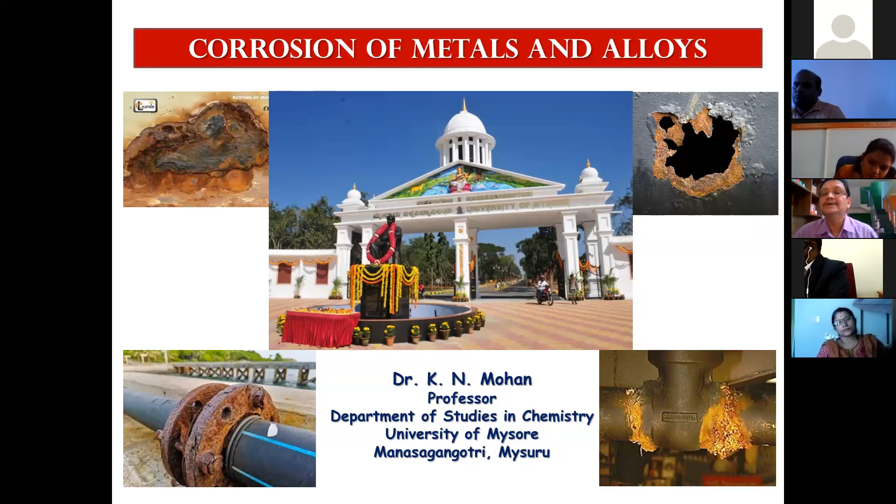So in today's talk, I am going to put before you some of the important basic aspects of corrosion of metals and alloys with the following viewpoints. So when we are talking about this particular process called corrosion of metals and alloys,

we need to understand why the study of corrosion of metal is so important. Is it that much important? That is the most important thing.

As you are the participants of the refresher course from different disciplines, you may all be coming from some of you participating from the chemistry background, physics background, material science background, electronics background, geology background. So in every area, we need to understand why the study of corrosion of metal is that important.

And the second thing is we must understand why metal is corroded. When metal is corroded, what is the mechanism? If it is so, what is the mechanism?

So once you understand this, is it possible to measure the corrosion rate? What are the techniques we use? Because we need to develop a most precise technique for the measurement of corrosion of metals and alloys. And also we need to understand the principle behind the measurement of corrosion rate.

So using this principle, what are the methods that we are going to adopt? And finally, I am also going to touch in today's talk on certain corrosion control strategies. I'm not going to speak more on corrosion control strategies today, because I have one more lecture on the 14th where I am going to talk about the present scenario in corrosion control strategies of metals and alloys. So with this viewpoint, today I am going to discuss a few important things.

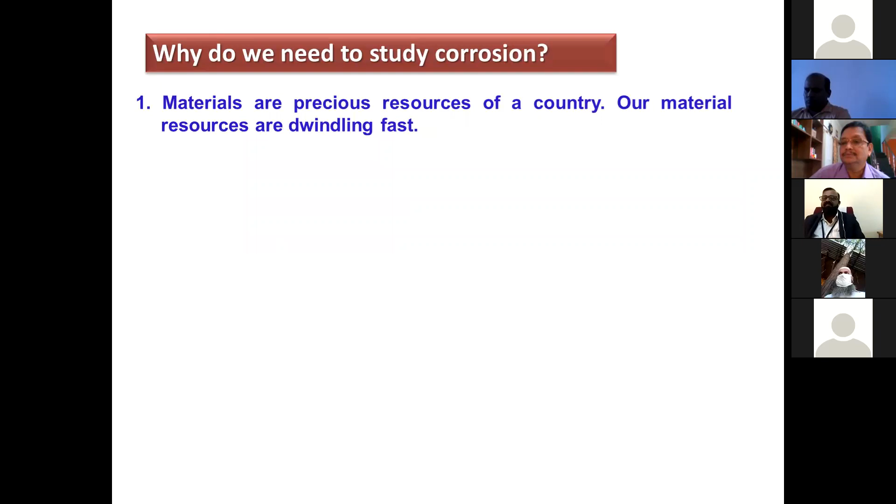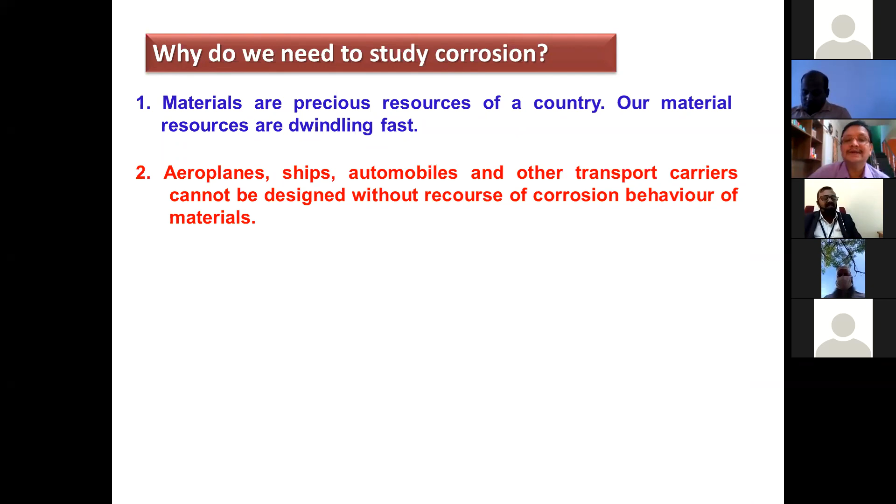We might notice corrosion in various areas like aircraft applications, marine applications, automobile applications, and transport carriers. Whenever you use materials in these applications, one must understand the designing aspects, which require knowledge of the corrosion behavior of the materials used. So in all these sectors, before designing a particular component, one has to look into the corrosion behavior of these materials.

We might have noticed various instances in the recent past, including crashing of civil and military aircraft, naval and passenger ships, explosion of oil pipelines and oil storage tanks, collapse of bridges and decks, and failure of drilling platforms and tanker trucks.

Last but not the least, another important area where the study of corrosion is important is that it is a threat to the environment. Whenever a metal gets corroded, it may cause pollution in the aqueous media, and pollution in the environment in various kinds of environments.

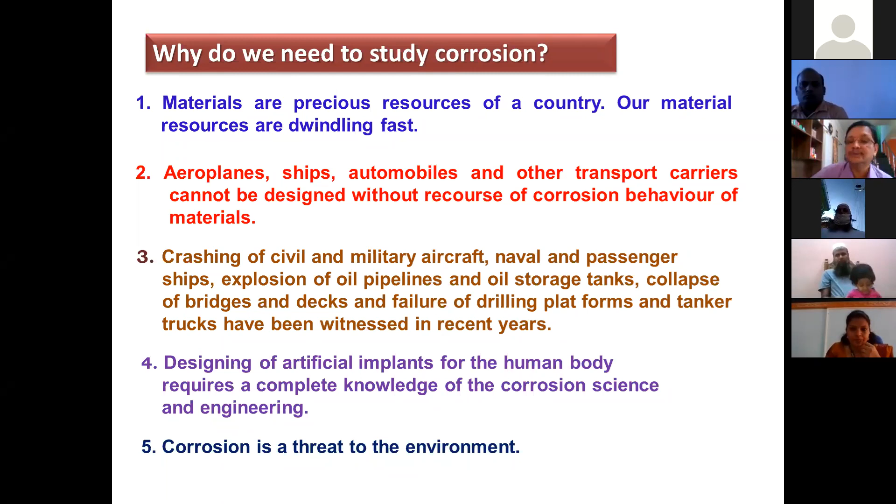Keeping these five important views in mind, one must understand that the study of corrosion is most important, and understanding the mechanism of corrosion is also most important in designing various components using metals and alloys in these industries.

So therefore, with this context, the study of corrosion of metal is also most important for safety of the equipment, and economics, because you might have seen premature failure of bridges and structures. One of the major reasons for this is corrosion. We might also notice the failure of operating equipment.

So therefore, almost all countries all over the world, due to industrialization and the use of various different varieties of metals and alloys, are pouring millions of dollars into just preventing metal from corrosion. We found that the cost of corrosion annually in the US is over $1.4 trillion. In 2019, it is around 4.2% of US GDP.

Also, a report in 2019 states the Indian economy suffers a loss of around 1,75,000 crore annually due to the corrosion of metals and maintenance, which is around 2.5% of Indian GDP. So therefore, the study of metal corrosion is a most important area in metallurgical operations in the materials sense.

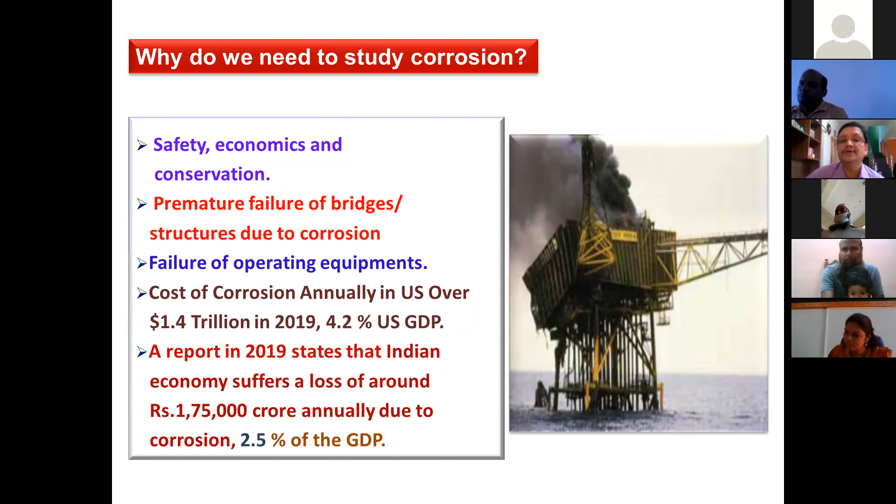I just put before you some of the incidents that happened in the recent past. One of the most important reasons reported for all these disasters is mainly due to corrosion. You might have noticed the Bhopal disaster that happened in December 1984.

One of the most important reasons for this disaster is the leakage of MIC, methyl isocyanate gas, a highly poisonous gas used as a pesticide. The leakage of this gas is mainly due to the storage tank, which is made up of steel. The inner part of the storage tank was damaged, which cannot be noticed from the outer surface. As a result, a small hole or small damage in this tank led to the leakage of MIC.

As you know, thousands of people lost their lives, and hundreds and thousands are still suffering. The report submitted by the fact-finding committee after studying all this indicated that the plant was not in good condition, and many of the machines were too old. That is the report submitted to the concerned authority.

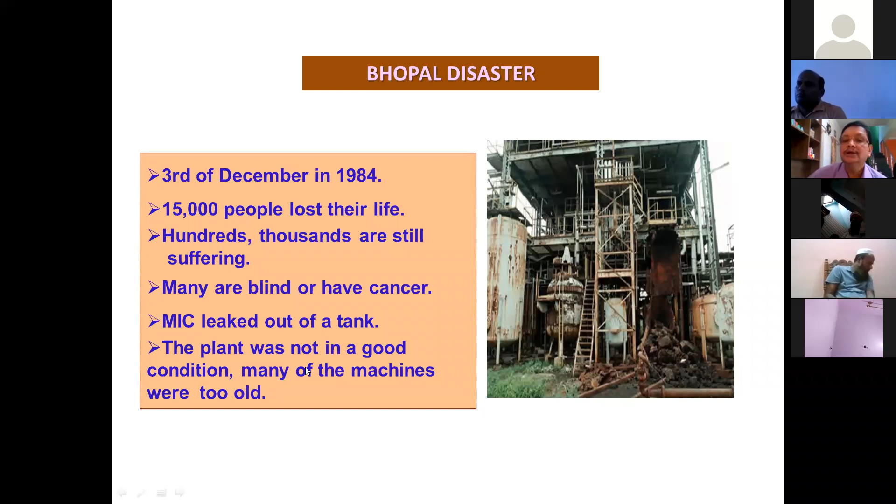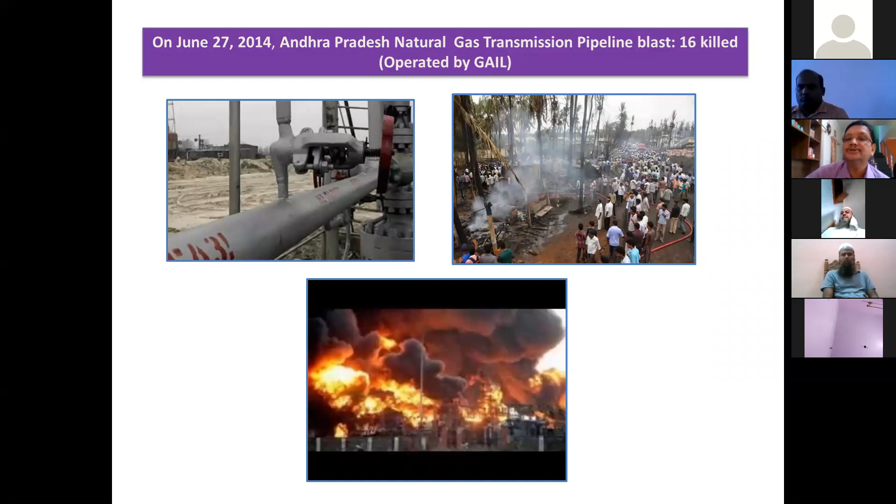So just look here at some other important incidents. One recently happened incident is in Andhra Pradesh in 2014, the natural gas transmission pipeline blast. This is one of the most important areas where corrosion of metal has extensive applications. This is GAIL, Gas Authority of India, where the inner part of this gas transmission pipe was damaged due to corrosion that was not noticed on the outer surface.

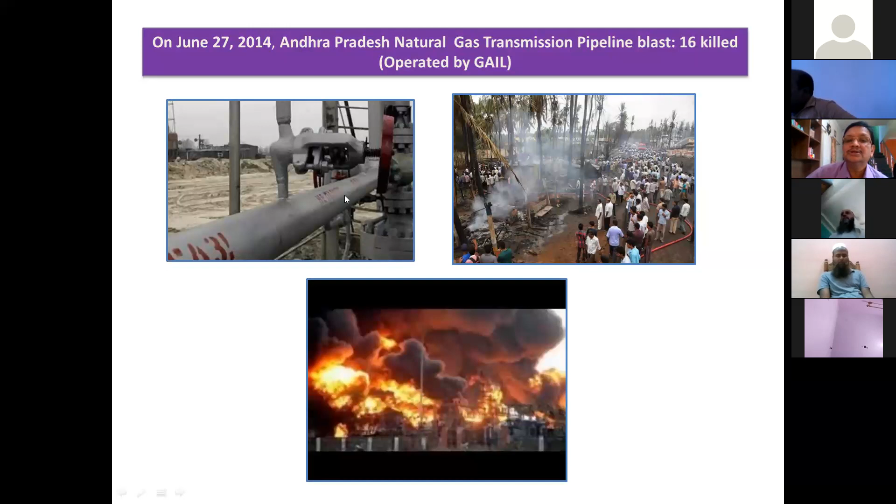Therefore, maintaining these pipelines or equipment from corrosion is a most important part, particularly in gas transmission pipelines. As a result, millions of dollars or millions of rupees are lost, and not only that, many people lost their lives. I think you might have noticed this recently.

The same type of natural gas transmission explosion occurs all over the world in various instances. Another important example is the Carlsbad, New Mexico gas line explosion. It happened in 2000, and is described as one of the second worst tragedies in US history. This is also a gas transmission pipeline damaged because of corrosion.

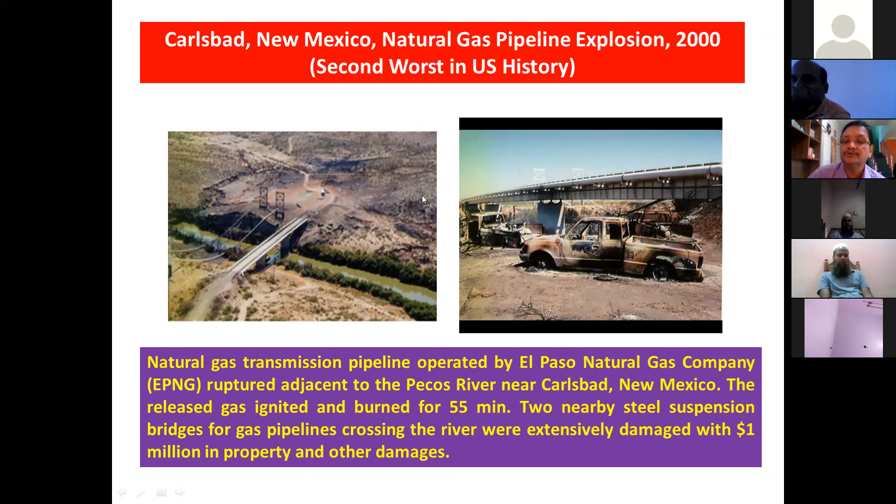This is one more incident that is also because of the gas transmission pipeline of British Petroleum Oil Gas, operated by the US, where this severely damaged the inner portion of the gas transmission pipe.

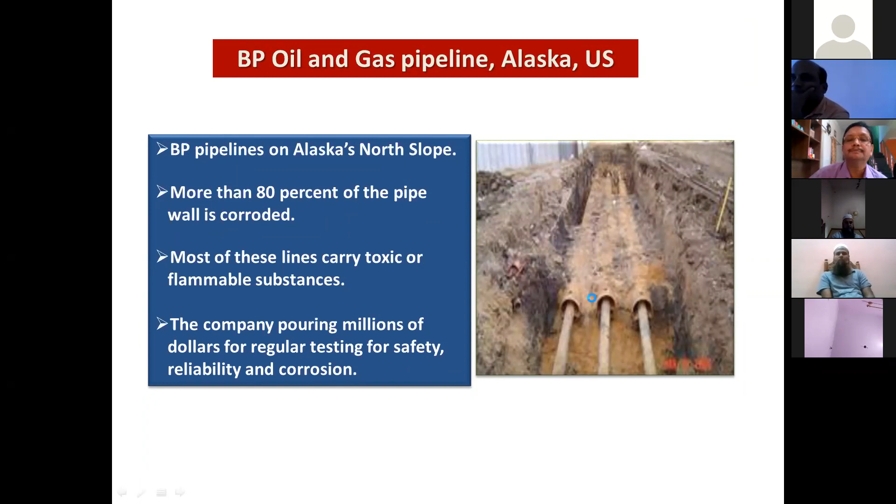Another most important area is aircraft application. One incident that happened, popularly called the Aloha incident, occurred on April 28, 1988. A 19-year-old Boeing 737 aircraft operated by Aloha Airlines lost the upper fuselage near the front of the plane at a flying height of around 24,000 feet. As a result, many people lost their lives.

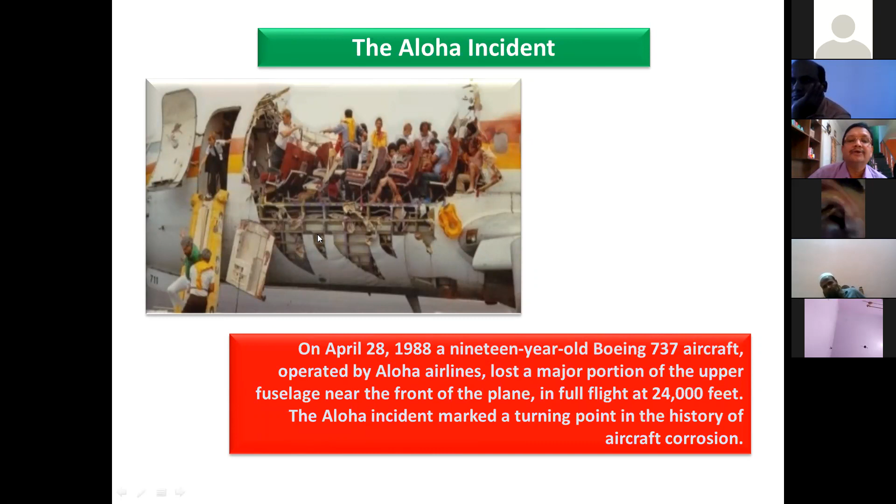The reason behind that, noticed after a fact-finding committee, was that certain parts of the aircraft were damaged because of corrosion.

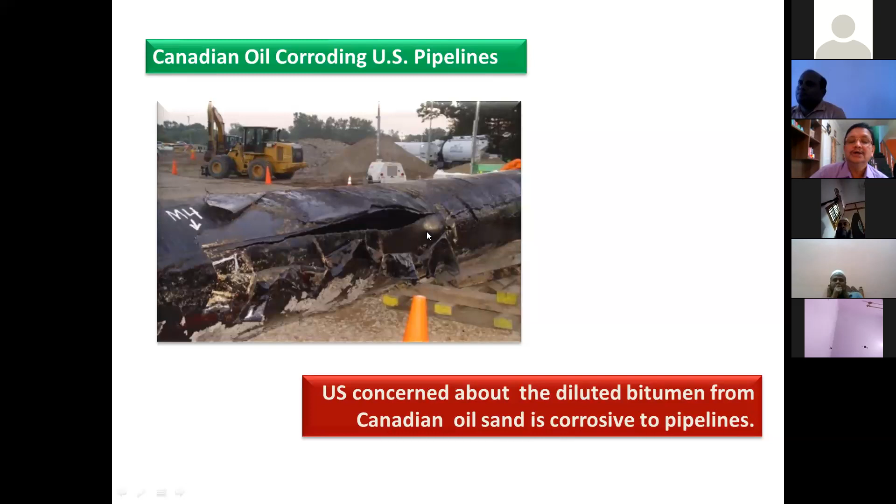This is one more example, the huge crude oil transmission pipeline operated by the US, where Canadian oil is transmitted through this huge pipe. One of the most important contaminants of this crude oil is a diluted amount of bitumen, which is highly corrosive. You might think, why not use the plenty of polymer-based materials used in oil and natural gas industries instead? But it is not possible to use these, so metals are inevitable to use in oil and natural gas industries. Therefore, they undergo corrosion because of the corrosive constituents in the crude oil. This is one important area.

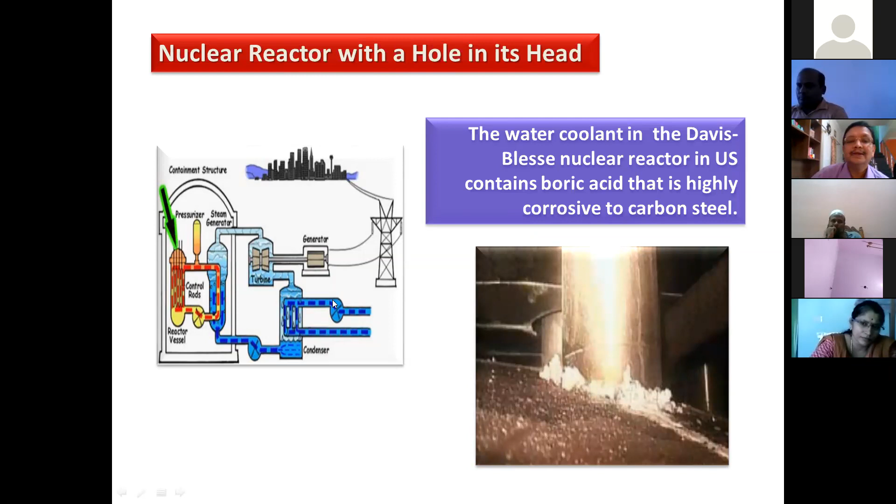As a result, one such incident happened in a nuclear reactor in the US called the Davis-Besse nuclear reactor, where the reactor vessel was damaged. You know the mechanism and type of process occurring in a nuclear reactor - if even a small damage occurs in the reactor vessel, you can imagine the type of disaster that could result. That is also due to corrosive substances.

This is another important example. The same kind of disaster happened in the Mihama 3 nuclear reactor in Japan in 2004, called pipeline rupture caused by flow-accelerated corrosion. These are other important examples.

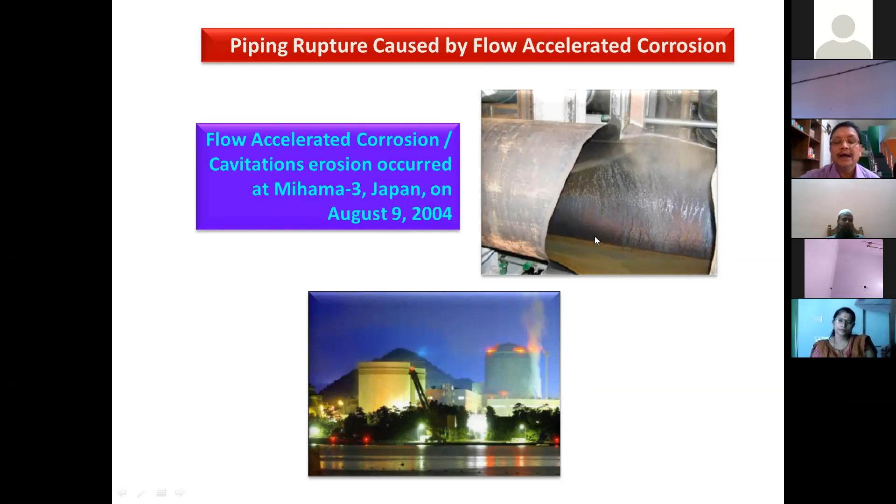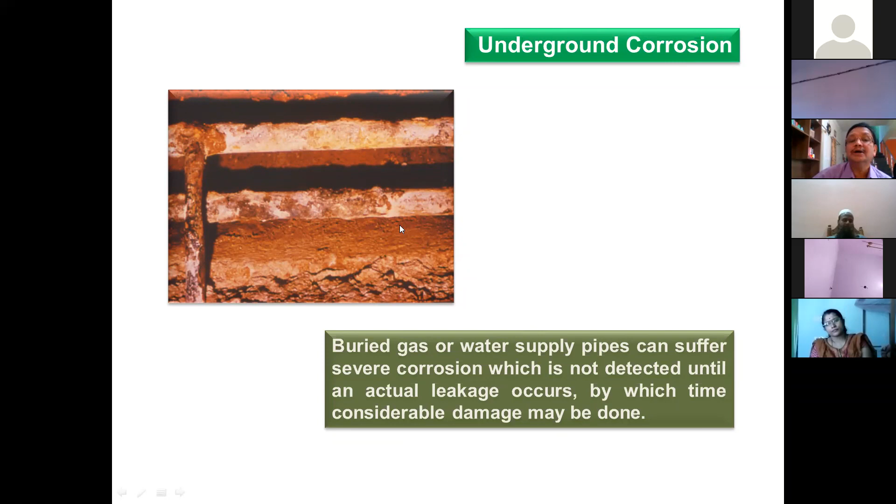Here you see the inner part of a gas or water transmission pipeline. Of course, the outer portion of this buried pipeline looks fine, but the inner portion is severely damaged. This causes severe damage before you even notice that damage has occurred in the pipeline.

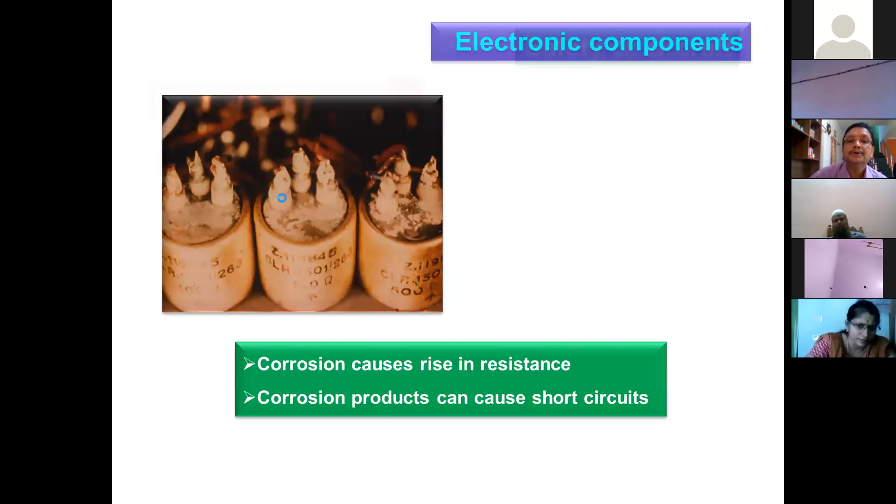More importantly, metals and alloys are used in various electronic components because metals are very good conductors of electricity. These materials, in a humid atmosphere and under atmospheric conditions, get damaged due to corrosion, which leads to rise in resistance and can also cause a short circuit. This is one of the most prone parts of aircraft applications, subjected to severe damage because of corrosion.

Another important sector where corrosion plays a significant role is marine applications, where some of the important components are made up of certain metals and alloys. These metals and alloys are also subjected to highly corrosive electrolytes of seawater, which contains a large quantity of dissolved salts. Apart from that, there are high buffeting waves. All these factors are responsible for damage to marine components, so in marine applications, the corrosion of metals or alloys plays a most important role.

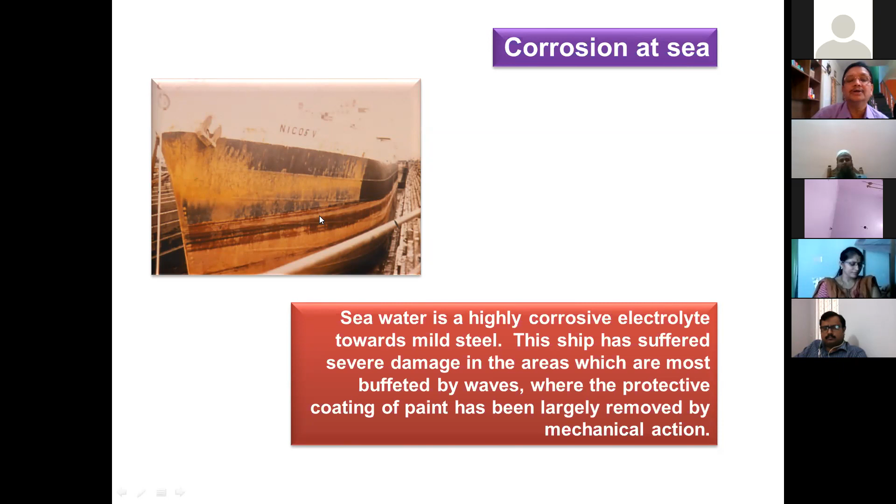So when looking into all these important examples, we find that the study of corrosion of material or metal is a most important part from the materials point of view. Therefore, today's talk is restricted to the corrosion of metals and alloys, but not necessarily only metals and alloys undergo corrosion.

Almost all varieties of metals undergo deterioration, meaning they lose their properties and mass due to environmental effects. It is a natural tendency. The process of corrosion is a natural tendency of the compositional elements present in materials, so that the materials or metals return back to their most thermodynamically stable state, which I'll explain a little later.

As I told you, today's talk is restricted to only metals and alloys. Not necessarily, there are plenty of other materials including polymers, plastics, rubbers, ceramic materials, concretes, bricks, and varieties of composite mechanical mixtures of two or more materials with different properties. They also lose their properties due to different environmental constituents and effects.

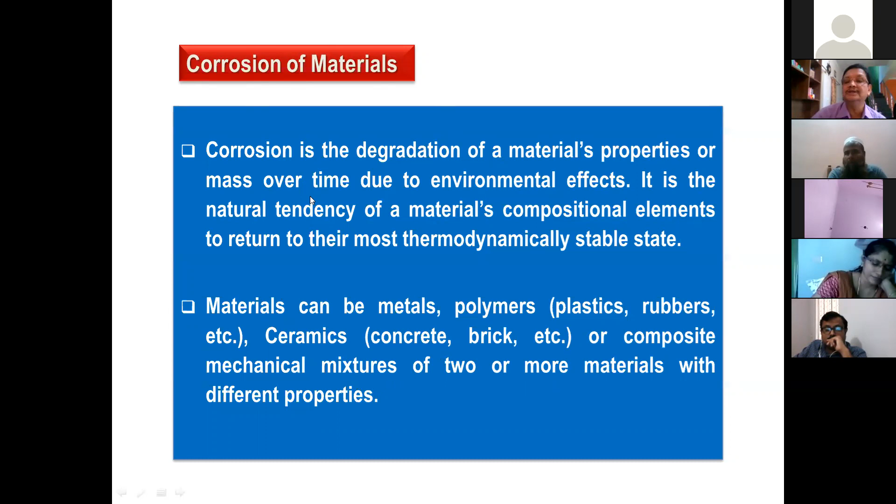So as I told, metals or materials get deteriorated and lose their properties due to varieties of environmental factors, and because of the elemental composition of the materials. The question here is: why is it so? Why does the metal get corroded?

Almost all metals and alloys are chemically unstable with respect to the environment, which includes varieties of constituents. We commonly call these corrosive constituents. They may be in the gaseous state, sometimes in the liquid state, sometimes in the vapor state. These corrosive constituents inevitably come in contact with materials, and therefore the material loses its stability.

Whenever a material loses its stability or undergoes corrosion, it may occur by means of an important chemical process called the oxidation process. This oxidation process is mainly responsible because of the presence of plenty of oxygen in the corrosive environment. Therefore, there is a certain driving force which causes the metal to undergo corrosion.

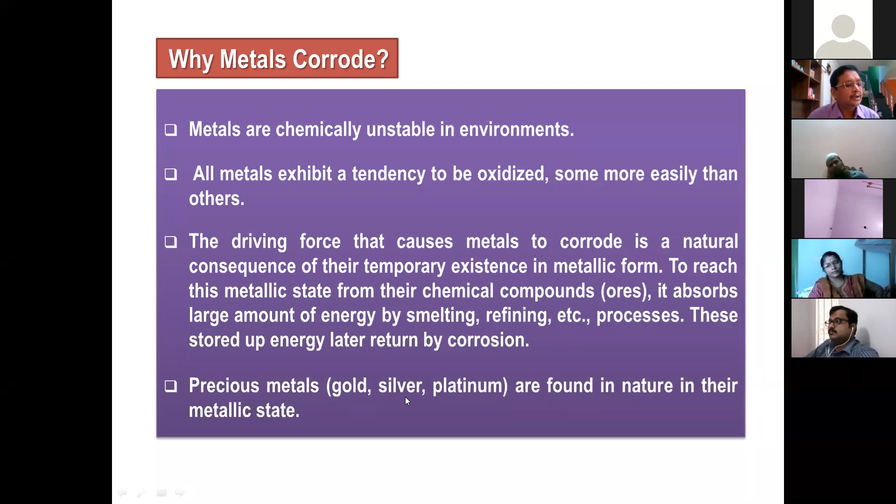When these metals are in contact with certain corrosive constituents, maybe gases, liquids or vapors, they tend to lose this stored energy by means of this process called corrosion. This is a spontaneous process that doesn't require any external supply of energy. The metal loses its thermodynamically stored energy. But certain metals like gold, silver, platinum, palladium are available in their native states and are stable for a certain extent. This is the technical reason behind why metals get corroded.

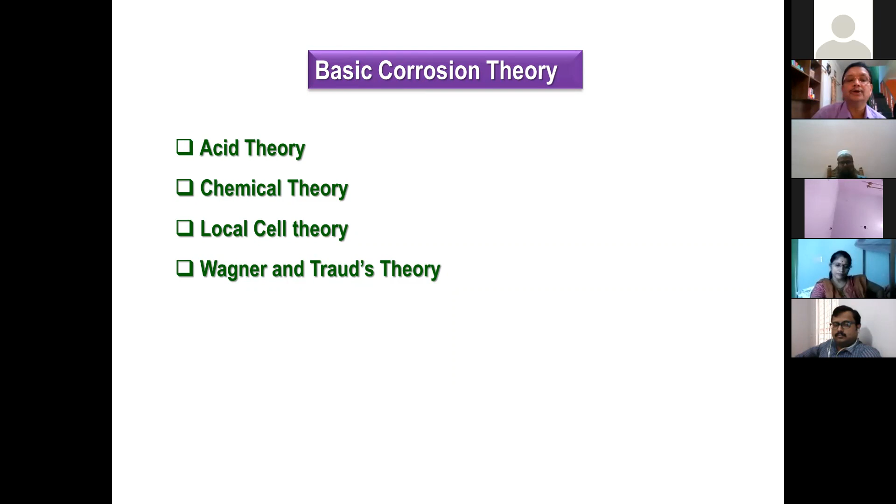Once you understand why metal gets corroded, there are varieties of theories which explain the mechanism of corrosion. Let me put before you a few important ones, starting from a very basic acid theory to the most accepted and well-developed theory called Wagner and Traud's, or local cell theory of corrosion. So there are four theories: first, acid theory of corrosion; second, chemical theory; third, local cell theory; and lastly Wagner and Traud's theory, proposed by an electrochemist, which is the most accepted theory. I'll go very briefly through all four theories of corrosion, not in detail.

As this theory itself says, the corrosion of any metal is due to the contact of this metal with some acidic environment. Not necessarily a direct contact of metal with acids like sulfuric acid, nitric acid, hydrochloric acid, or carbonic acid, but there is a generation of these acids due to the constituents of the atmosphere. The major constituents of atmosphere are atmospheric carbon dioxide, moisture, and plenty of oxygen.

The presence of these three important constituents in the atmosphere is responsible for the generation of acidic components, mainly carbonic acid or bicarbonic acids. This acid generated due to these chemical constituents in nature is responsible for the metal undergoing corrosion, leading to the formation of corrosion products like iron bicarbonate, iron hydroxycarbonate, and ferric hydroxide. This is a simple reaction mechanism.

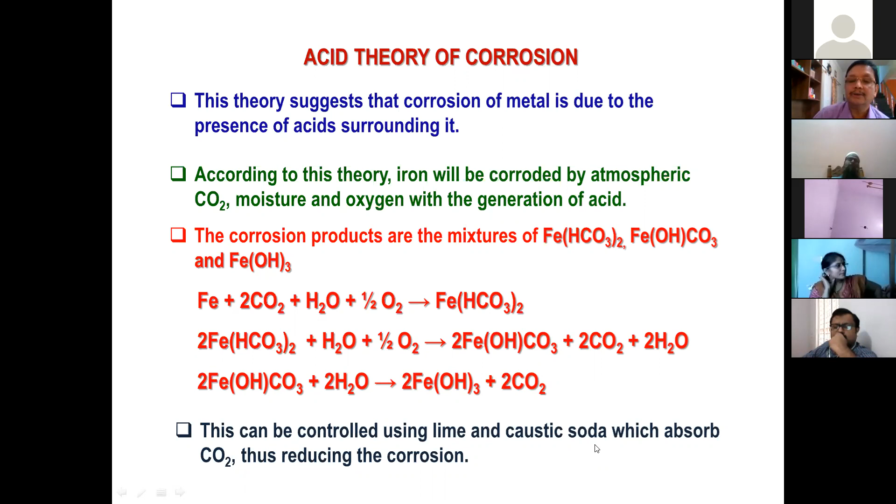The second theory is the chemical theory, also called dry corrosion. Not necessarily is an acidic environment responsible for metal undergoing corrosion. There are plenty of atmospheric gases like oxygen, halogens such as chlorine, bromine, iodine, oxides of sulfur, hydrogen sulfide, oxides of nitrogen, and fumes of various chemicals which are responsible for metals undergoing corrosion, provided the metals are in good contact or good affinity with these atmospheric gases. Therefore, the extent of corrosion of any metal depends upon the chemical affinity of the metal towards these reactive gases in a dry condition, in the absence of moisture.

In spite of all these, oxygen is one of the most important constituents responsible for most of the corrosion of substances compared to other gases and chemicals. So depending upon the type of gases involved in dry corrosion, we call it oxidation corrosion where oxygen is responsible for the corrosion of metal, or corrosion by varieties of other gases like chlorine, sulfur dioxide, hydrogen sulfide, oxides of nitrogen, since these gases are responsible for corrosion.

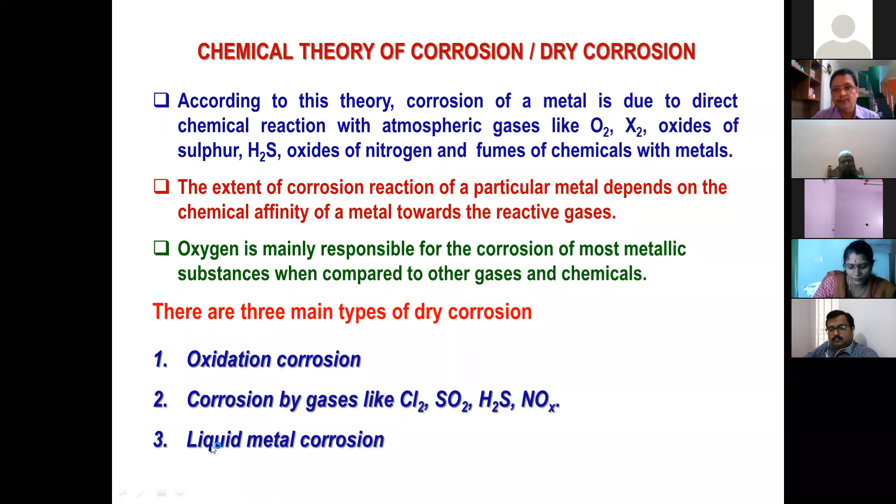The third theory, which is the most accepted and still used for prevention of varieties of metals, is called local cell theory. One must have a brief knowledge of electrochemistry to understand this local cell theory of corrosion.

There is a formation of electrochemical cells on the surface of the metal. These cells formed on the surface of the metals are commonly called local cells. These local cells are created on the surface of the metal due to one of the most important reasons: heterogeneities on the surface of the metal. The metals are not homogeneous in nature. While it is being made, there are varieties of inhomogeneities, imperfections, and disorders.

We commonly call this heterogeneities. This is one of the most important reasons for the generation of local cells, for the creation of local cells on the metal surface.

Once these local cells are created on the metal surface, there is a difference in potential developed on the same metal surface, on different parts of the metal surface. Once the potential difference is developed, it acts as a local cell, an electrochemical cell. This cell is responsible for any metal to undergo corrosion, as was well explained by local cell theory.

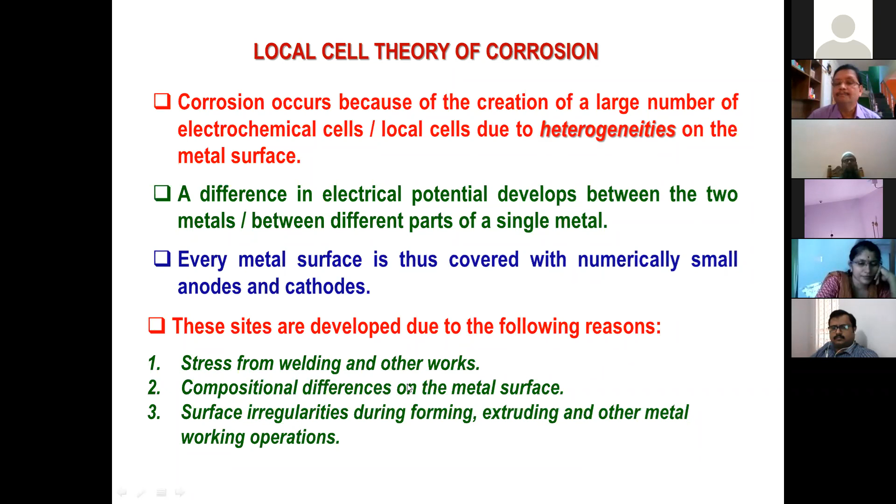Finally, the extension of the local cell theory of corrosion was well explained by the theory called Wagner and Traud's theory. There is a small modification in this theory. Of course, this creation of cells on the surface is essential for the metal to undergo corrosion, but the impurities and other heterogeneities are not such an important factor for the creation of cells.

The most important thing explained by Wagner and Traud is that the corrosion of a metal is accompanied by a cathodic reaction. Whenever a cathodic reaction occurs simultaneously on the metal surface, there must be some cathodic material. The cathodic materials are corrosive causing materials, a corrosive environment.

So once a metal is in contact with the corrosive environment, there will be formation of corrosion cells, electrochemical cells, anodic and cathodic regions. So it's not due to heterogeneities, it is mainly due to the corrosive environment which is responsible for the metals to form corrosion cells.

These corrosion cells involve three important chemical processes. The first important process is the anodic process, called the oxidation reaction. The oxidation process occurs at the anodic area of the metal because of its very low electrode potential. Once the anodic process takes place, the electrons get released, and these released electrons flow through the metal towards the cathode.

Therefore, corrosion follows basic laws of thermodynamics. It is an electrochemical process. So under controlled conditions, it can be measured, it can be repeated, and it can also be predicted.

The corrosion process is accompanied by an electrochemical reaction involving two half cell reactions. In one half cell, anodic reaction takes place, and in the other, cathodic reaction takes place. Anodic reaction is the release of electrons, oxidation.

The cathodic reaction depends on the nature of the corrosive environment. Depending on the nature of the corrosive environment, there are three cathodic reactions: oxygen reduction reaction, hydrogen evolution from neutral environment, or hydrogen evolution from acidic environment.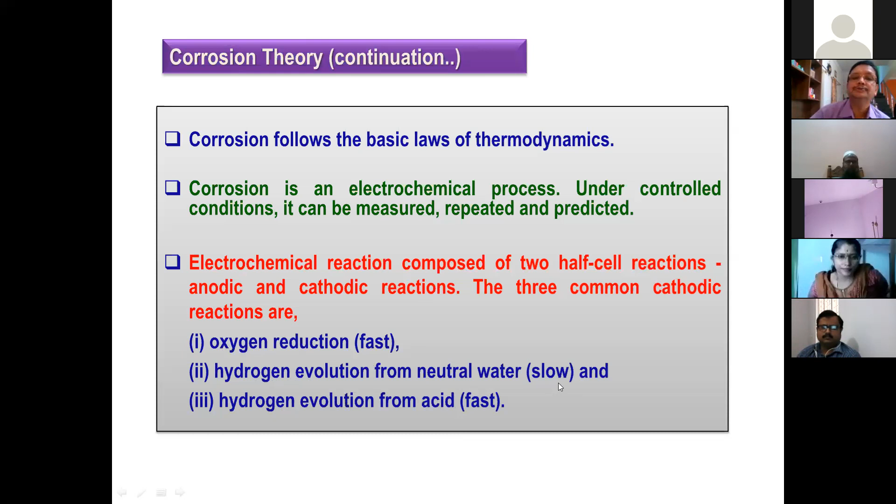This is the mechanism of the corrosion reaction explained by Wagner and Traud. This is an oxidation reaction where the metal is getting oxidized with the release of electrons. These electrons are then reduced in presence of varieties of corrosive environments. It may be evolution of hydrogen in the absence of oxygen.

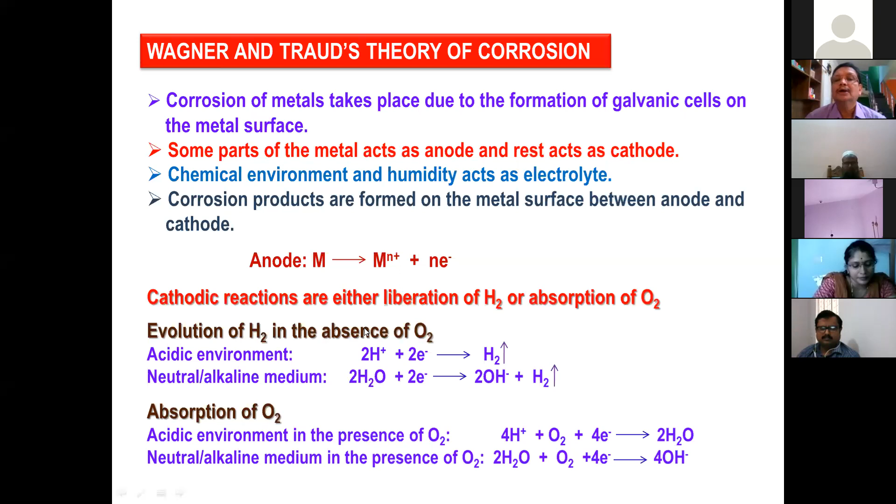It is an acidic, neutral, or alkaline environment. This is how evolution of hydrogen occurs, and this reaction occurs in the absence of oxygen. These are the varieties of cathodic processes occurring in the electrochemical corrosion mechanism.

So this is how, when a metal like iron is in contact with a corrosive environment, some part of the metal, because of its lower potential, acts as an anodic region. This is the anodic region where oxidation occurs. The released electrons move through the metal, with electrons flowing through it.

These electrons, in contact with certain corrosive environments - say an acidic environment here, or sometimes a neutral environment - get reduced with the evolution of hydrogen gas. This process continuously takes place until the whole metal in contact with the corrosive environment is completely deteriorated by means of corrosion.

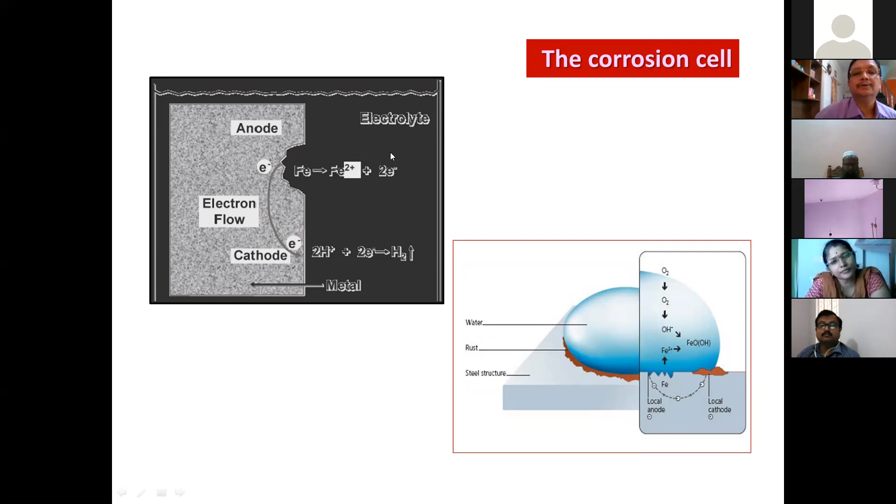Once you understand the theories of corrosion, two important processes occur: the anodic process and the cathodic process. The anodic potential and cathodic potential of a metal play the most important role for the severity of corrosion. Therefore this potential is called oxidation potential and reduction potential. Together we call it oxidation-reduction potential.

This anodic potential is denoted by EA, which combines with the cathodic potential denoted by EC. The total potential is E. If this total potential is a positive quantity, then the reaction proceeds - I mean, the corrosion reaction proceeds spontaneously. Therefore, corrosion is a spontaneous process.

So almost all metals have a unique value of this corrosion potential. They are called so under standard conditions. So this potential we call the standard electrode potential, denoted by E naught. This value, the standard electrode potential of a metal under standard condition,

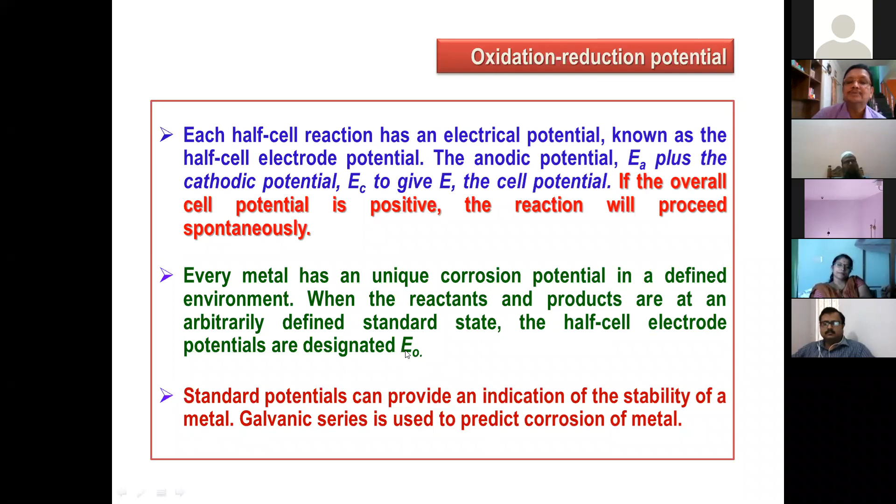signifies the nature of corrosion and the extent of corrosion in a corrosive environment. Therefore, the value of the standard electrode potential plays the most important role in understanding the severity and magnitude of corrosion. So this value of standard electrode potential has been determined and tabulated in the form of a table.

So this is a table. This is a standard table which is available in almost all literature. These are the normal cathodic reactions - I have selected a few important metals. This is the respective standard potential value.

Look here, at the top is gold, having a value around 1.5. If you keep moving towards the bottom, this potential value slowly decreases and comes to a negative value when you move almost to the bottom.

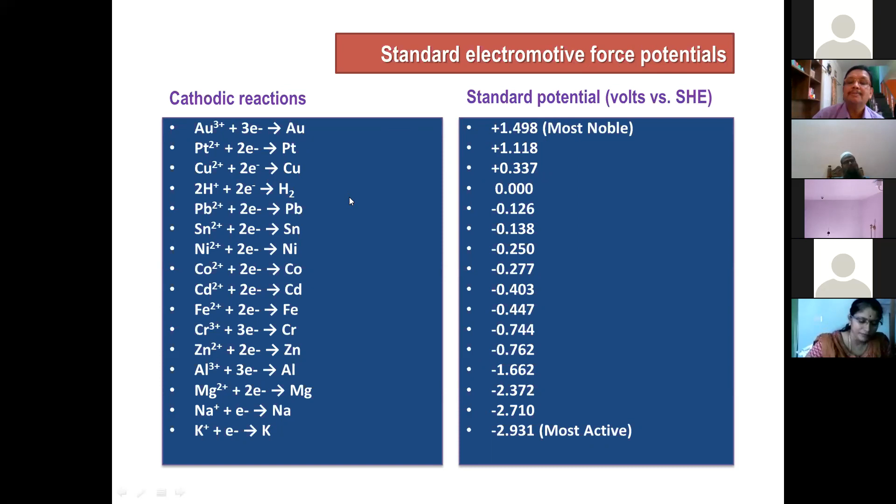Look at certain metals like potassium, sodium, magnesium, aluminum, and so on - they have a negative potential value. Any metal whose electrode potential is highly negative is more prone to corrosion; they are the most active metals. Metals with more positive values are more stable metals. So the value of the standard potential decides the magnitude of corrosion in a corrosive environment.

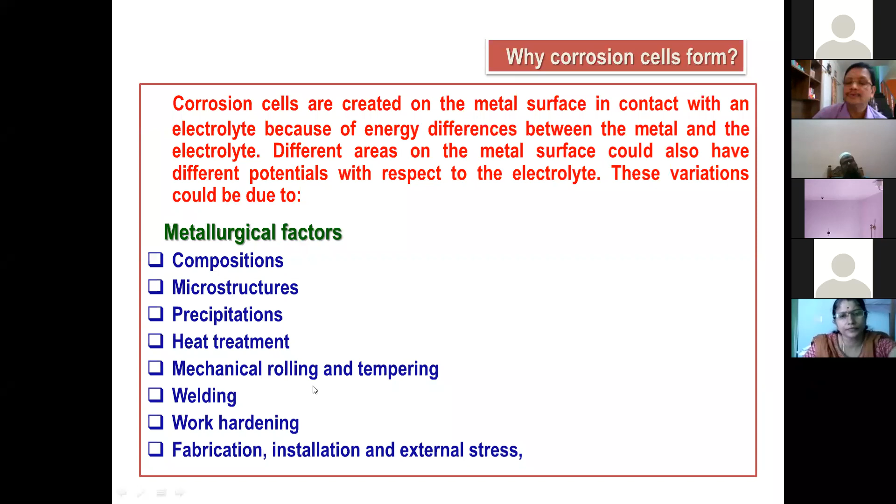So I told you corrosion cells are formed on the metal surface. How are corrosion cells formed on the metal surface? The corrosion cells are formed on the metal surface due to varieties of metallurgical factors - these are some important ones like composition, microstructure, precipitation, heat treatment, mechanical rolling, welding, work hardening, fabrication, and installation. There are varieties of metallurgical factors responsible for corrosion of metal.

Apart from that, there are varieties of environmental factors - like concentration of the corrosive environment, which forms a concentration cell, environmentally induced stress corrosion cracking, hydrogen induced cracking. Certain microorganisms are responsible for corrosion, called MIC - microbiologically induced corrosion - temperature induced corrosion, mechanical environmental induced erosion, galvanic, CP impressed current anodic dissolution.

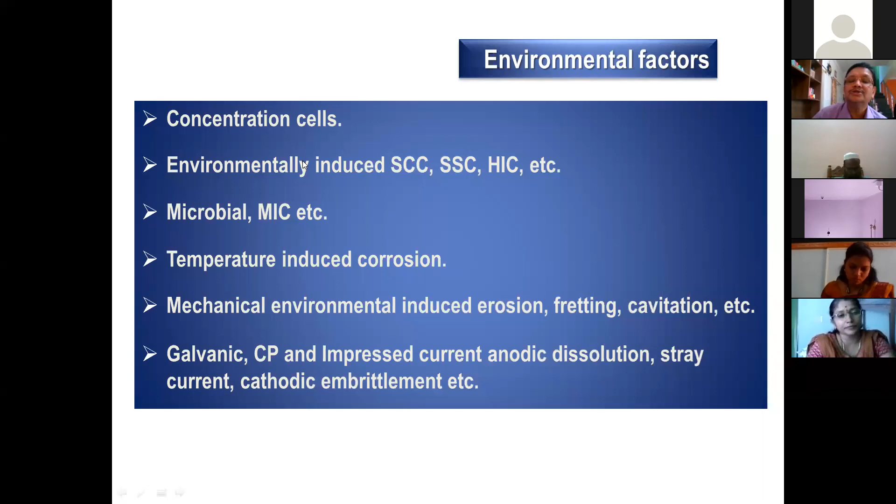So therefore there are plenty of environmental factors responsible for metals forming corrosion cells, anodic and cathodic environments. So depending upon the nature of the corrosive environment, we have varieties of corrosion, because we need to understand that certain corrosive environments are responsible for a particular kind of corrosion.

Depending on the kind of corrosive environment, we classify different classes of corrosion. One important class is uniform corrosion, where corrosion of metal occurs uniformly, and only one kind of corrosive environment is responsible for this type.

Number two is galvanic corrosion. This occurs due to the formation of a galvanic cell, one of the most important kinds of electrochemical cell, when two different metals, say copper in contact with iron, having different potentials, are in contact with a corrosive environment. A cell is created called galvanic cell, which is responsible for corrosion of the metal.

This is differential aeration corrosion, popularly called concentration cell corrosion. When a particular metal is in contact with a corrosive environment of different concentrations, the portion exposed to lower concentration acts as an anodic region, while the portion exposed to higher concentration acts as a cathodic region.

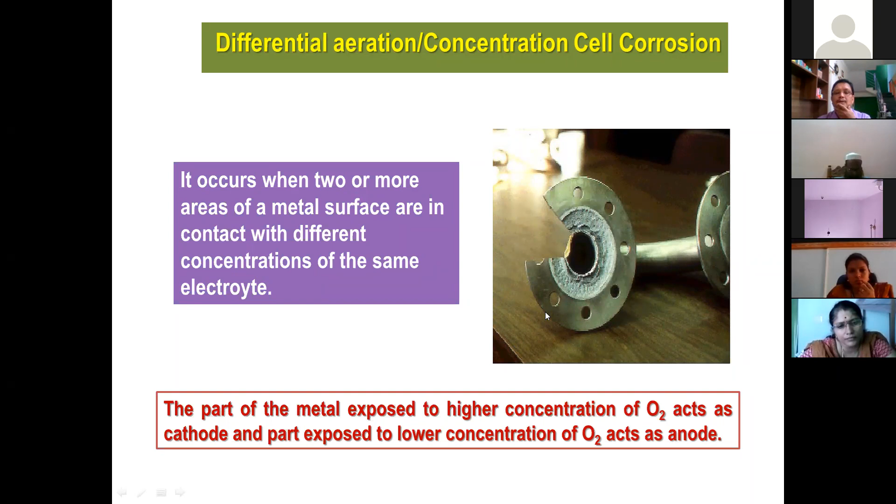Crevice corrosion is normally noticed in some automobile applications, where metals are in contact with metals, or sometimes metals are in contact with non-metals. In presence of a corrosive environment, this is responsible for crevice corrosion.

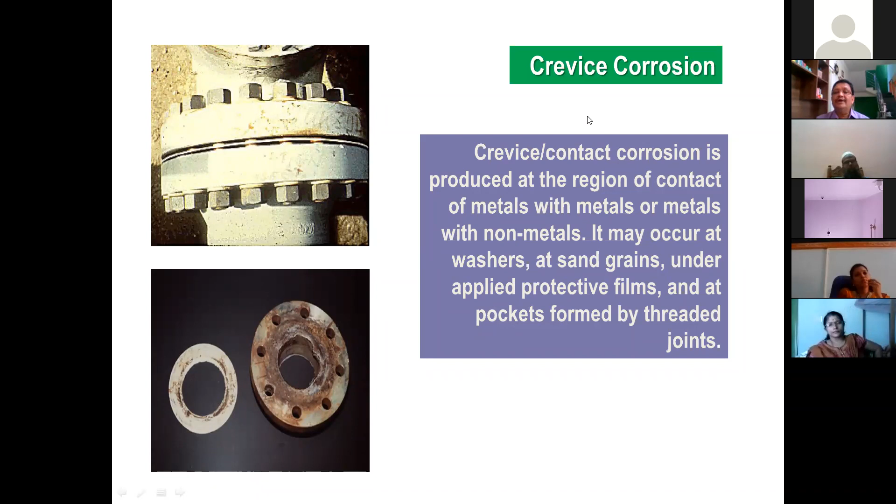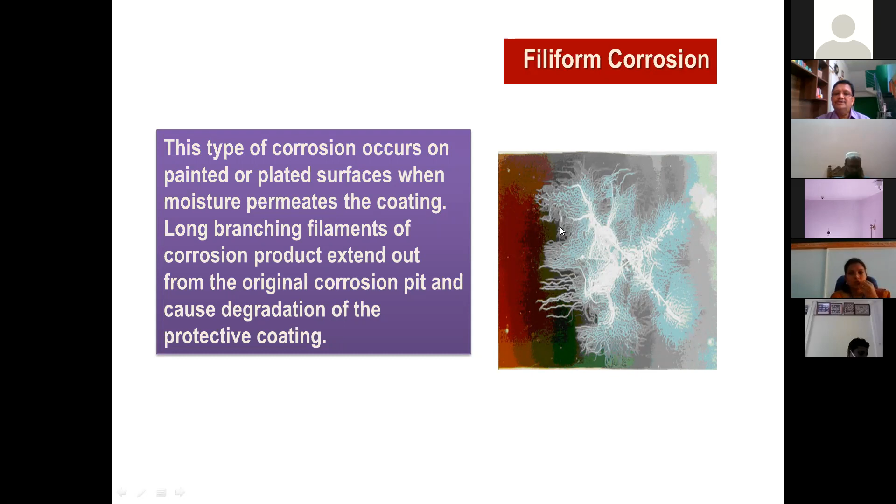Filiform corrosion is one of the most dangerous types, because one of the most important protocols for protecting metal from corrosion is plating or coating, whether organic coating, polymer coating, or metal coating. While coating a metal, we must take important precautions, because if there are any micro defects on the coating, corrosive electrolytes penetrate through these micro defects, and the entire inner portion of the metal is severely damaged due to corrosion.

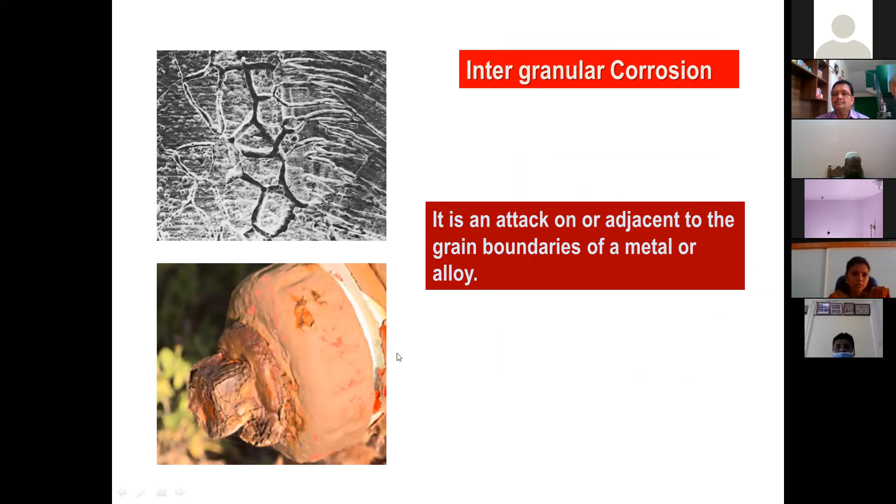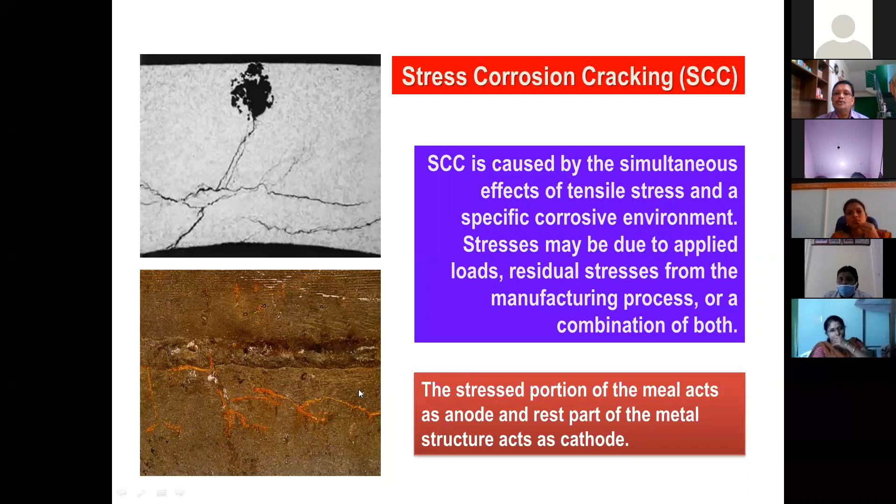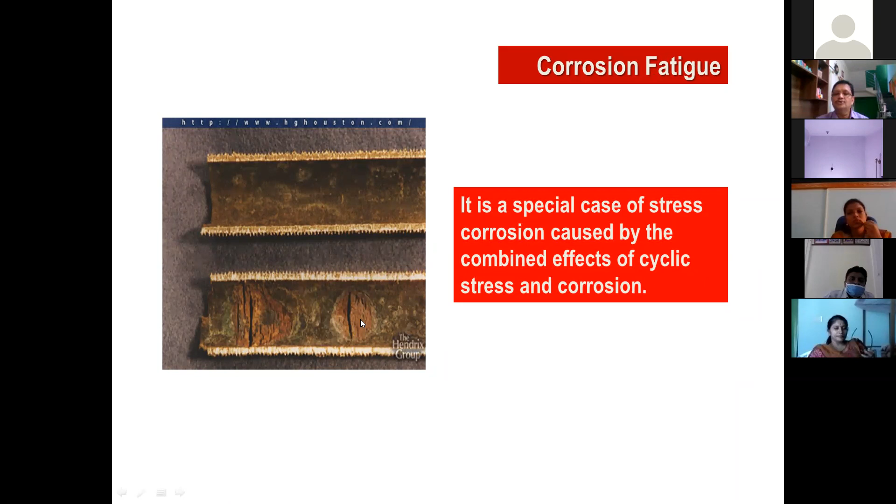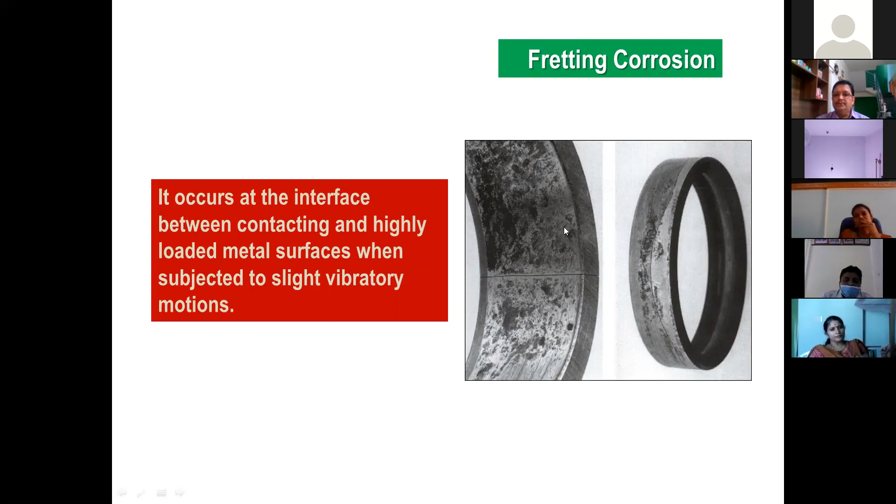Fretting corrosion is normally noticed in some automobile operations, where a high-speed rotating wheel is subjected to this kind of corrosion.

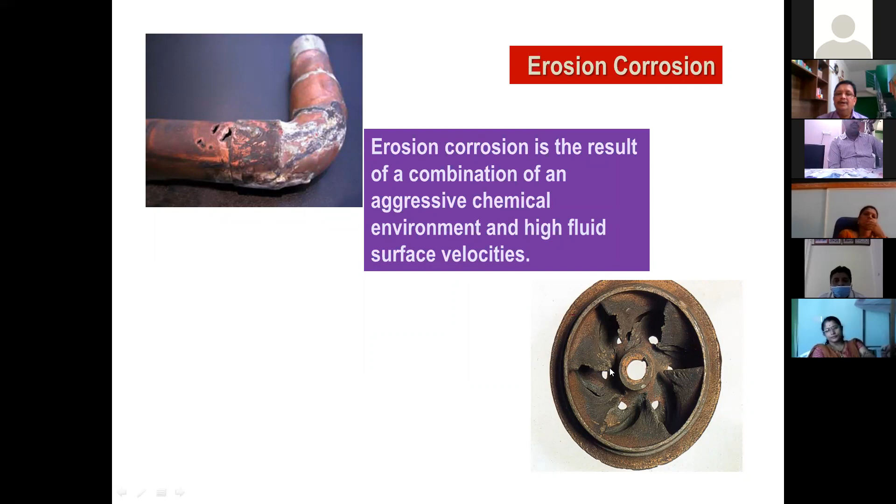De-alloying is another kind of corrosion where the alloy gets depleted. One important protocol to minimize corrosion is making the metal into an alloy, so when the alloy portion of the metal is depleted, the metal undergoes corrosion through a de-alloying process.

Corrosion in concrete occurs because plenty of varieties of reinforcing materials are used in concrete structures, which undergo severe damage due to a highly corrosive environment.

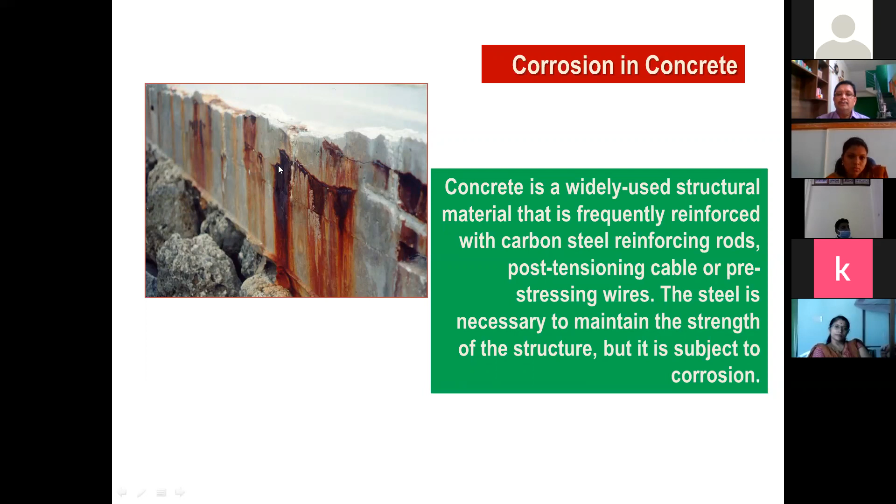Microbial corrosion is another important form of corrosion where certain microorganisms are responsible for metals undergoing corrosion, because the activities of microorganisms generate certain acidic or alkaline environments, and these environments are prone to corrosion.

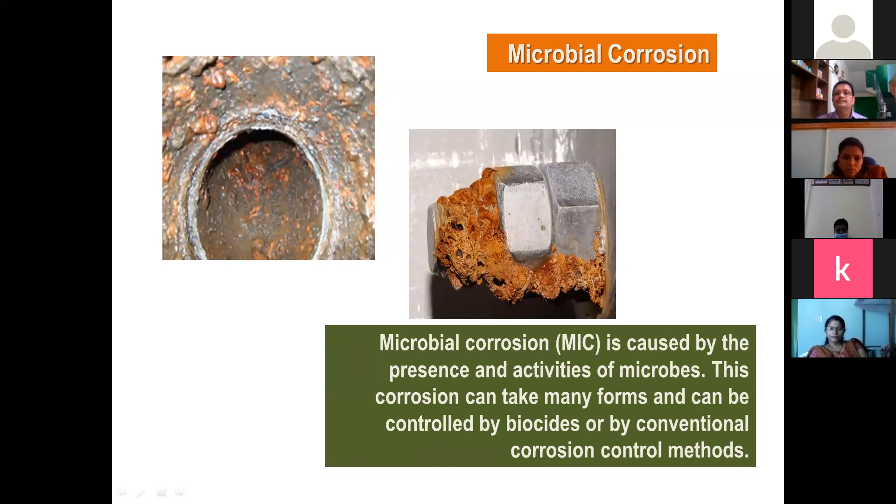So, keeping in view the different forms of corrosion, let me now briefly look into the varieties of different techniques used to measure the corrosion rate, which we call the kinetics of corrosion. The measurement of corrosion of a material or metal in a known corrosive environment is a most important task for a metallurgist, chemist, or anyone from a scientific background. When we look into the different techniques employed for measuring corrosion rate, we normally follow three important techniques.

One is called the mass loss technique, also called the gravimetric technique. Number two is the chemical technique. And the last one, and the most important, is the electrochemical technique.

This mass loss is based on the quantity of metal lost during corrosion. Once a metal is corroded under a known corrosive environment, a certain portion of the metal loses its property, meaning it is converted into its respective ore or compound. The metal converted into compound is lost, and the quantity of metal lost is taken into consideration in the analysis of corrosion rate. That is called the mass loss technique.

In chemical technique, certain chemical, physicochemical, or analytical techniques are used to analyze the material converted into corrosive compounds. There are plenty of chemical techniques, which may be electrochemical technique, or photochemical technique. There are varieties of spectroscopic techniques employed to analyze the quantity of metal lost by corrosion.

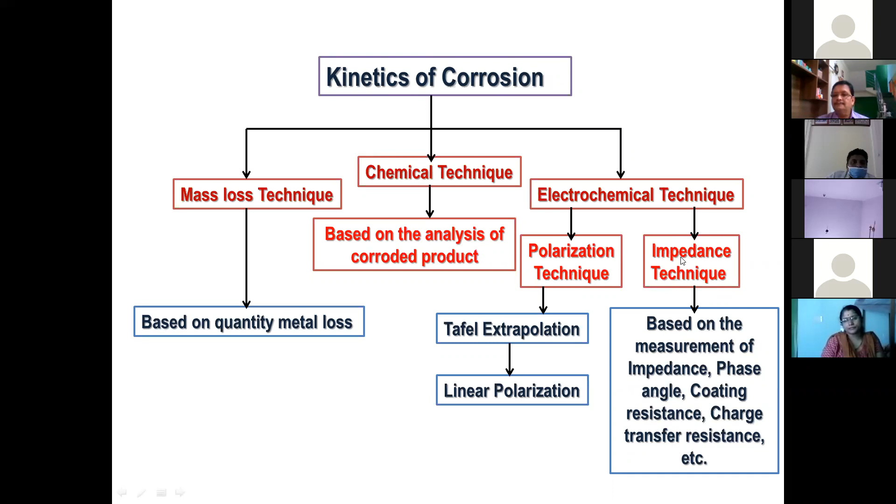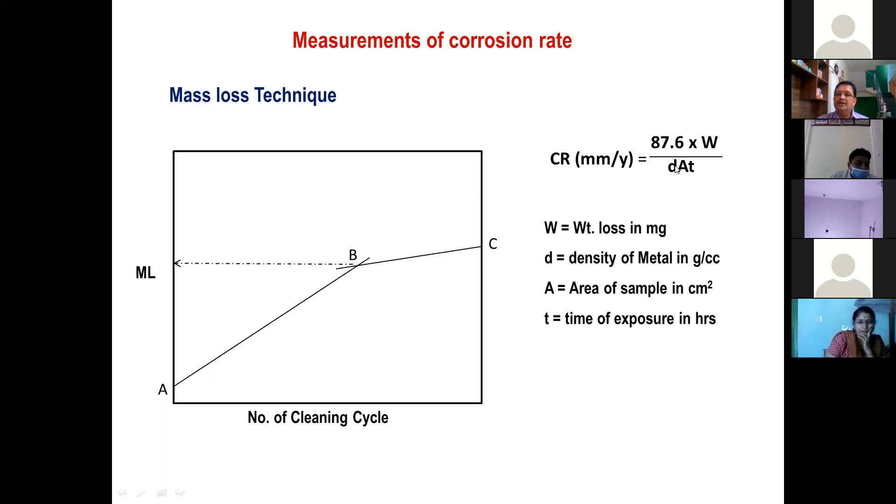This is the mass loss technique. We follow this protocol: once you measure the quantity of mass loss, keeping that in mind, we can calculate the corrosion rate using a simplified mathematical equation.

In polarization technique, I will give you some brief background on the principle involved in measuring corrosion kinetics. It is a measure of the polarization behavior of the metal. When a metal undergoes corrosion, a transfer of electrons takes place, since corrosion is an oxidation process. The extent of electron transfer is a measure of the current, called corrosion current.

Almost all metals under standard conditions are at an equilibrium potential, called standard equilibrium potential. Whenever a metal corrodes in a corrosive environment, the potential changes from the equilibrium value. This process of changing potential from the equilibrium value is called polarization. Polarization may occur in the cathodic direction due to a change in cathodic polarization, or it may occur in the anodic direction, meaning it may change in the anodic reaction. The extent of change in cathodic or anodic polarization is measured by means of the polarization technique.

In this technique, we use an external circuit to accelerate the anodic reaction by shifting its potential in the cathodic direction or the anodic direction. Once we supply external current, we keep measuring the potential and analyze the anodic polarization and cathodic polarization in the form of a curve, a plot.

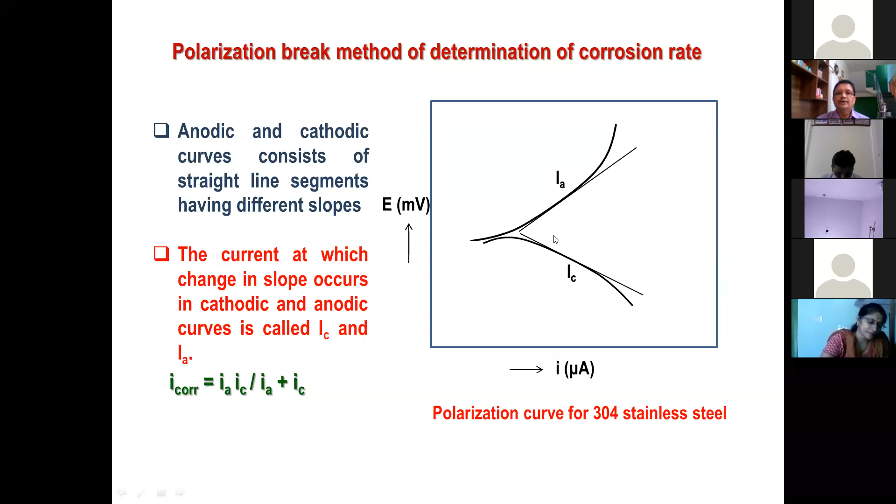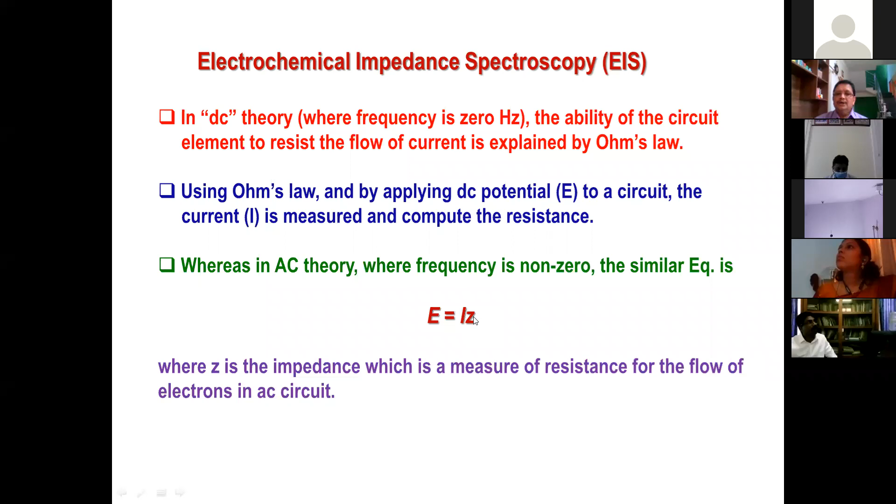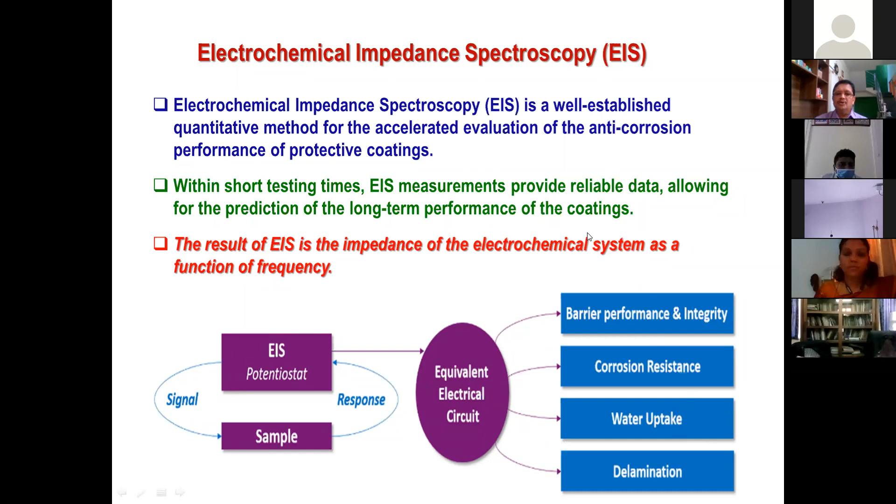This parameter is taken into consideration in analyzing certain important corrosion parameters. This is how we build the framework to understand parameters like barrier performance, corrosion resistance behavior, water uptake ability, and delamination. There are varieties of important corrosion parameters that can be obtained by this technique.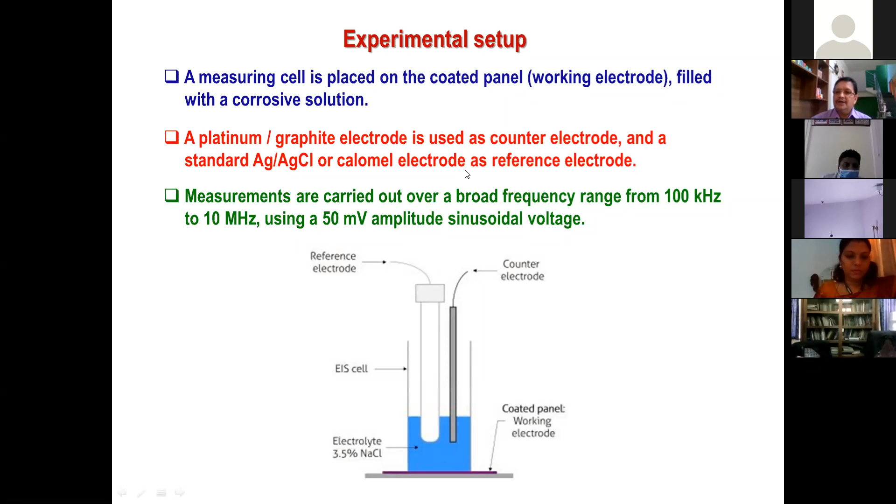This is a simple experimental setup for both the electrochemical impedance technique as well as the potentiodynamic polarization technique.

These are some important parameters, as I told you, coating. When a metal is coated to protect it from corrosion, we need to understand the coating resistance, charge transfer resistance, and double layer capacitance. These are some technical parameters, along with water uptake ability and finally corrosion rate. All these parameters can be analyzed with the help of electrochemical impedance technique.

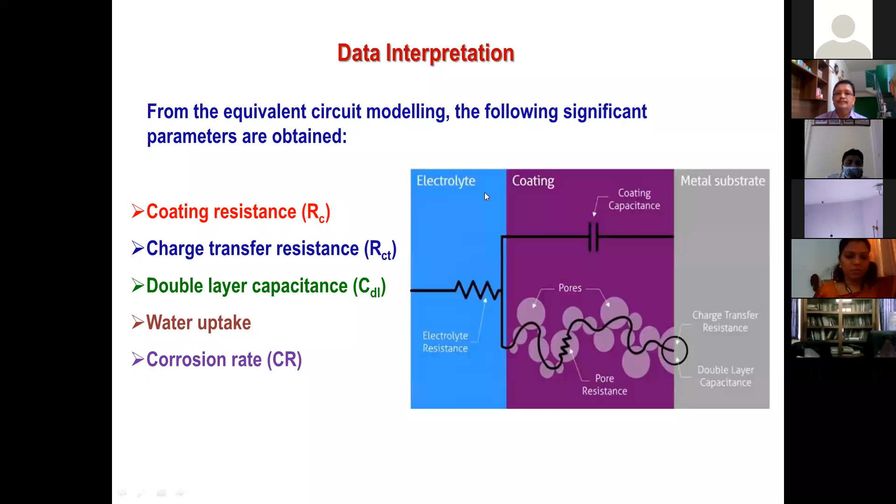Lastly, I am going to touch upon the final part of today's talk about corrosion prevention strategies and corrosion prevention methods.

When it comes to corrosion prevention strategies, there are varieties of strategies nowadays used for minimizing and preventing metal from corrosion, starting from design improvement. A particular design plays a most important role, particularly with respect to the corrosion of metal.

The second strategy is change of metal, because certain metals are used for certain applications. This change of metals can be done in varieties of ways: either by changing the composition of the metal, by elimination of tensile stress, by change of microstructure, or by introduction of surface compressive stress. All these four properties of metals are associated with metallurgical operations.

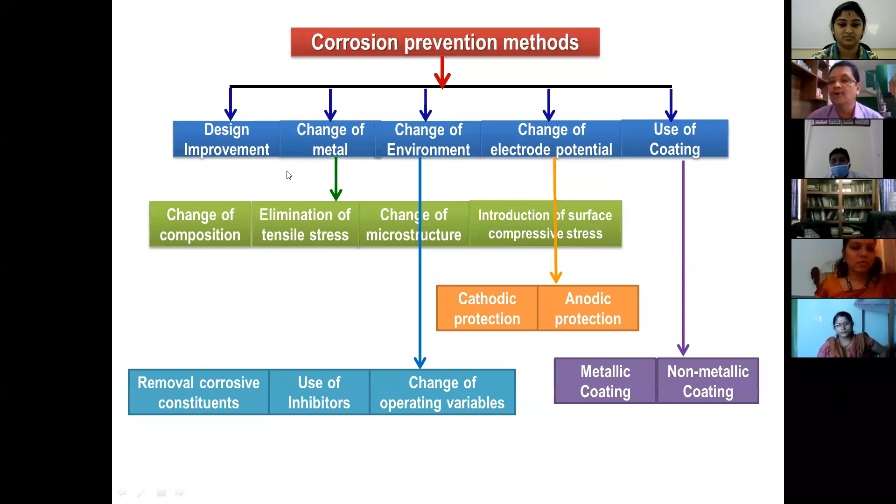Lastly, we can do it by use of coatings. Nowadays, we use a variety of coatings - metallic coating, non-metallic coating, polymer coating, organic coating. There are plenty of coatings nowadays in use for the control of corrosion or minimization of corrosion. Therefore, this is a skeleton which indicates the various protocols nowadays technicians or metallurgists follow to prevent the corrosion of metals. So this I told about the design.

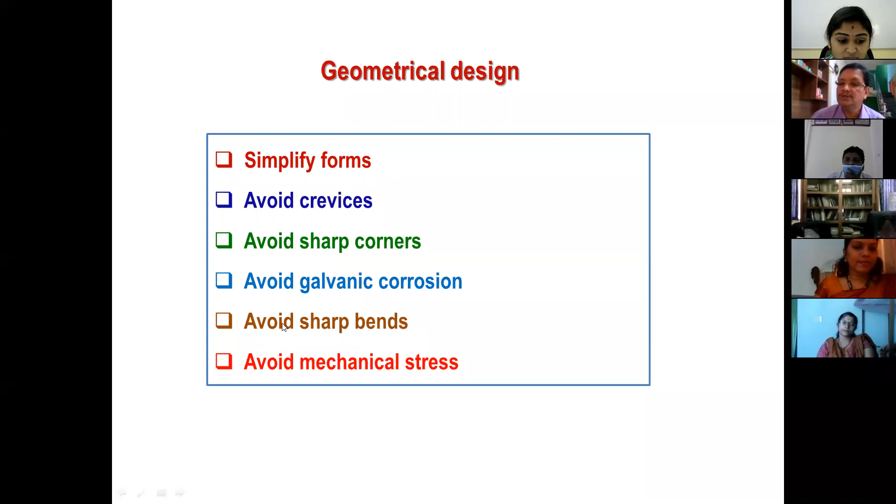What are the important designs which are responsible for metals to undergo corrosion? These are to be avoided - sharp corners, galvanic corrosion, sharp bends. All these are responsible for corrosion.

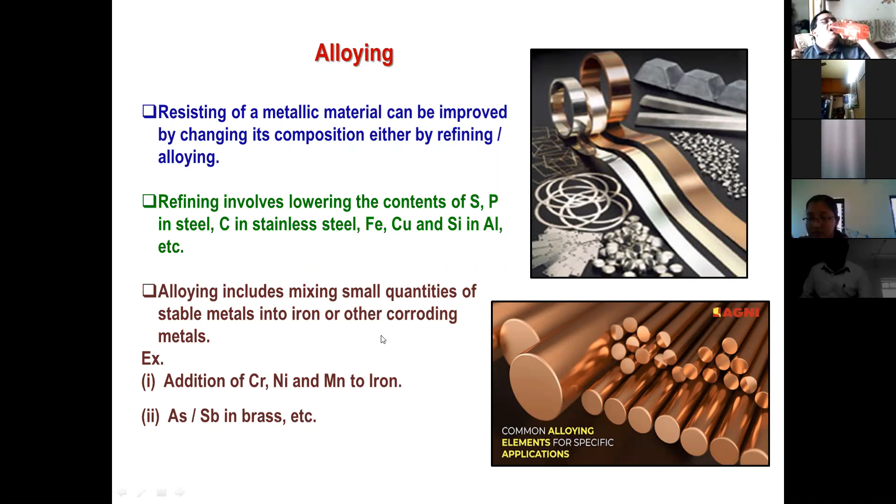Alloying is one of the most important protocols - mixing some stable metal with unstable metal. Say mixing some chromium, nickel with iron, so that these are stable metals making alloy. So we can control the corrosion of metal. Therefore, alloy is one of the most important protocols we need to follow.

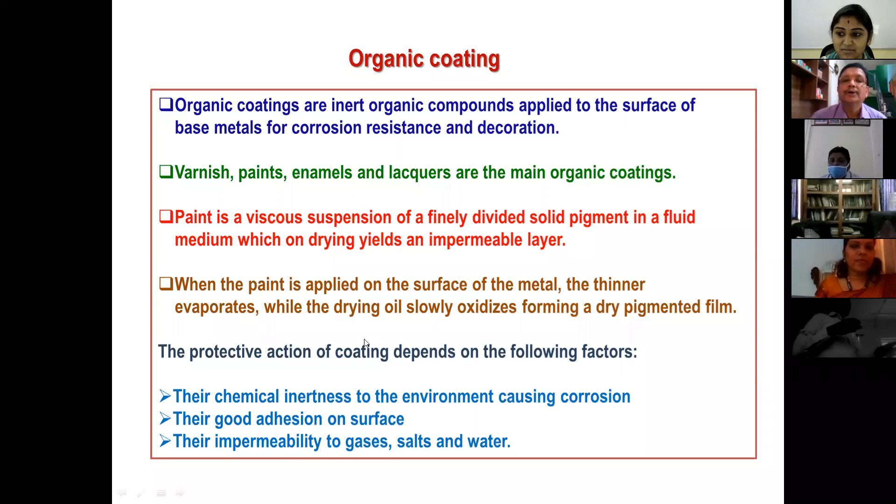Then organic coatings, inorganic coatings, polymer coatings - depending upon the requirement, depending upon the properties, depending upon application areas, we use corrosion protection. These are the various types of corrosion protocol techniques.

So this is one of the most important kinds of corrosion protection protocol called cathodic protection. Normally this type of corrosion protection protocol is followed by this technique. One such technique is called sacrificial anodic protection.

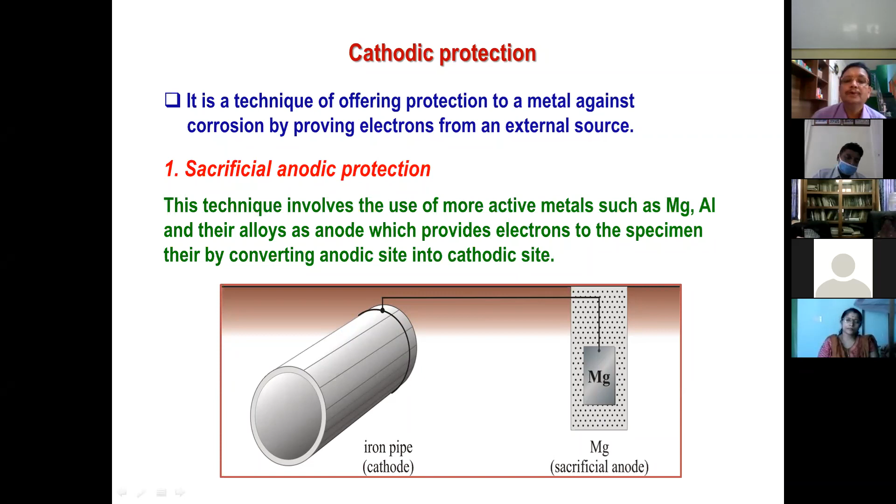Sir, Mohan sir. Tell me, madam. Time up, sir. I will conclude in another 2-3 minutes.

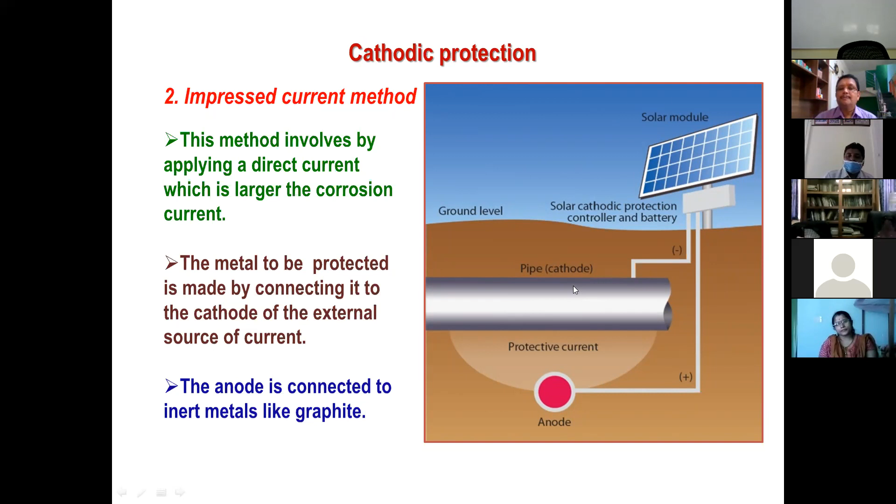Okay, sir. So this is what we call cathodic protection technique. There are varieties of other techniques.

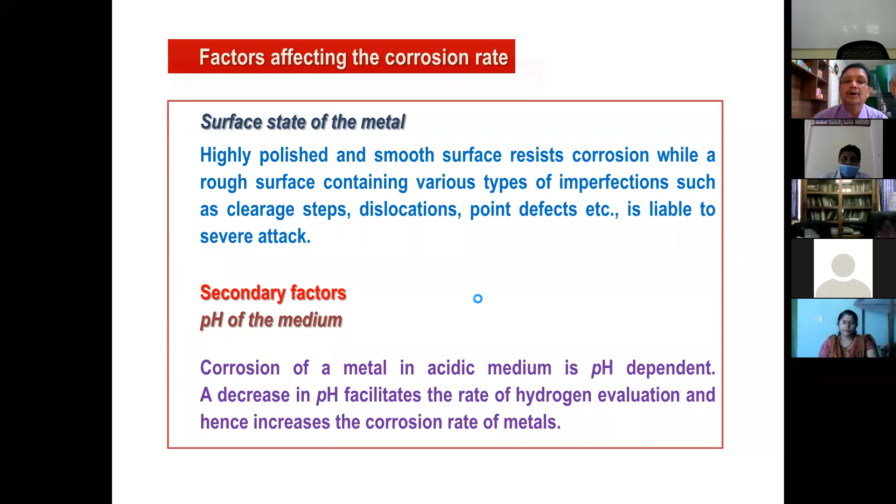These are the various factors which are responsible for the kinetics of corrosion. As I told, one of the primary factors responsible for corrosion is the electrode potential of the metal. The variety of secondary factors responsible for the corrosion of metal is the pH of the corrosive environment - is it acidic, neutral, or alkaline? Temperature is another important factor.

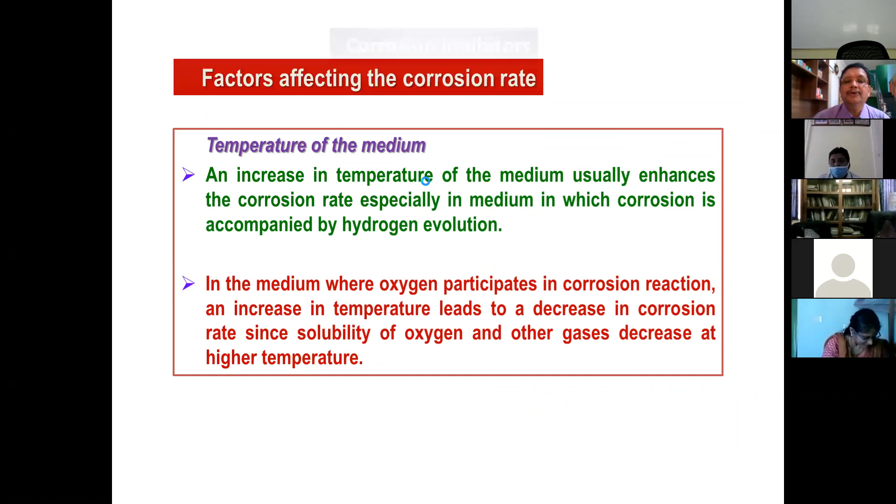Now I stop here for the first part of my talk, which includes the corrosion protection strategies, corrosion protection protocols, the corrosion prevention protocols by using varieties of different techniques. I will talk to you in my second talk about some of the recent developments. So with this, I'm just concluding my talk - the basic aspects of corrosion of metals and alloys is the most important subject in almost all material scientists, chemical scientists, physical scientists, mineral scientists, and so on and so forth.